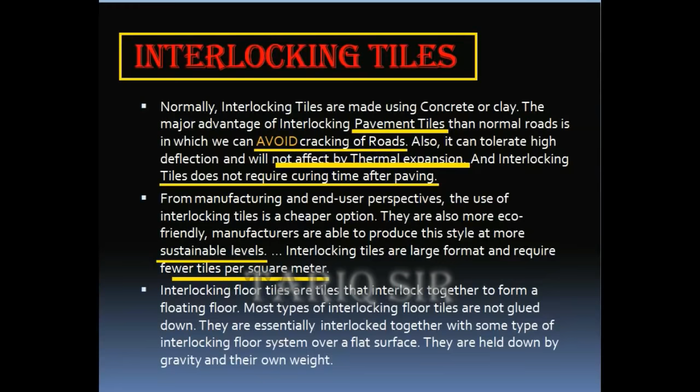And then the final thing is that it doesn't require curing. Whenever we have anything made out of concrete, or we use cement in particular, we have to use water. Then we come to the perspective of the manufacturer. It is a very cheap option, it is sustainable, and it needs very few tiles per square meter. For example, if you have a 1 square foot tile, a square meter is roughly 10 square feet, meaning you will need about 10 tiles per square meter.

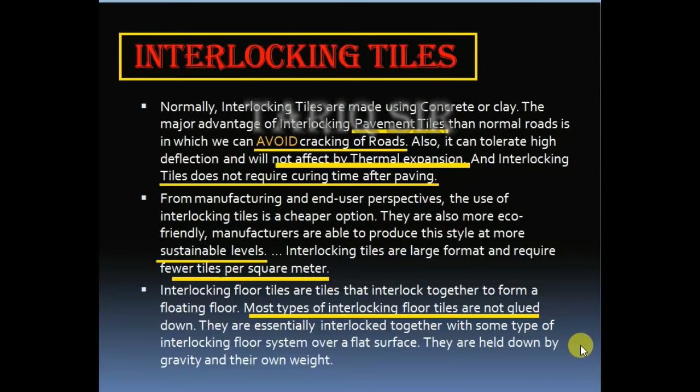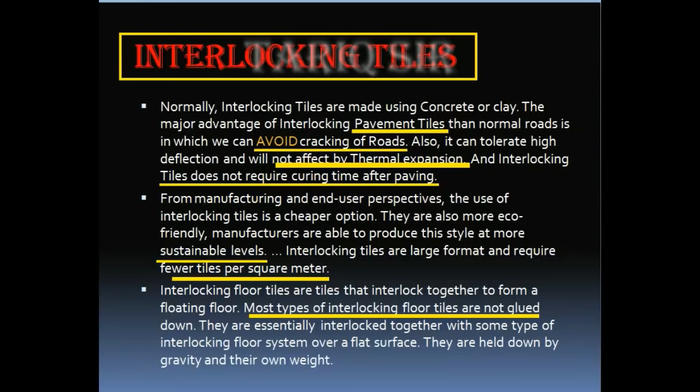Another important factor is that interlocking tiles do not require any material to fix between two tiles. They grip each other by themselves, so that's why it's known as interlocking. And in order to spread the tiles out on the floor, the road or the footpath, we require a flat surface. The surface should be absolutely flat.

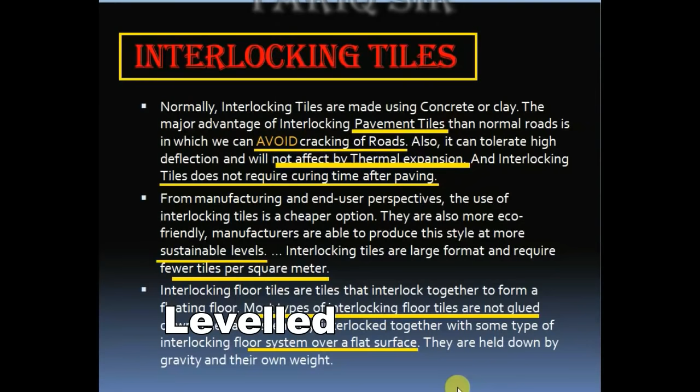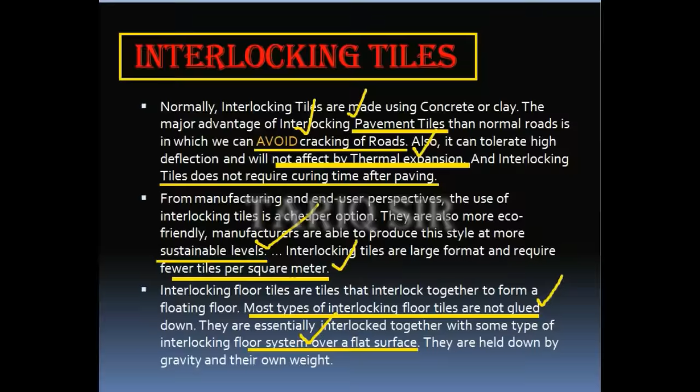So these are a few of the things. Number one, they are also known as pavement tiles. It avoids cracks. Then thermal expansion. Then it has a sustainable level. Then per square meter usage is less. Then you don't require any binding material, and you have to provide a flat surface in order to place these tiles. So now we'll come next to the cement concrete and hollow blocks. Before we begin, we'll go through some videos of fly ash and concrete hollow blocks.

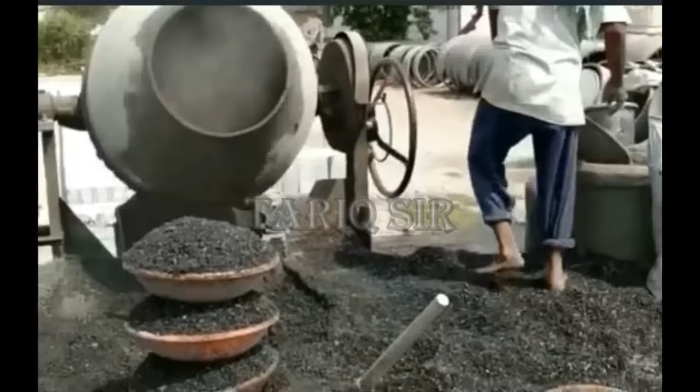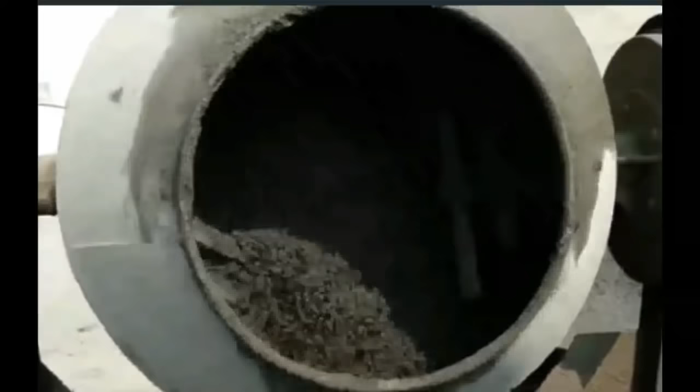Here you can see the bowls being filled with concrete, stone grit, and cement is being added to the mixture, and the mixer is running in full swing. Here are 3 bowls. Water is being added to get the proper consistency of concrete. This is done according to the required design, and according to that we take the ratio to acquire the required strength. Here we have grey cement, known as ordinary Portland cement, being taken out of the bag, and now the concrete mixing is absolutely ready.

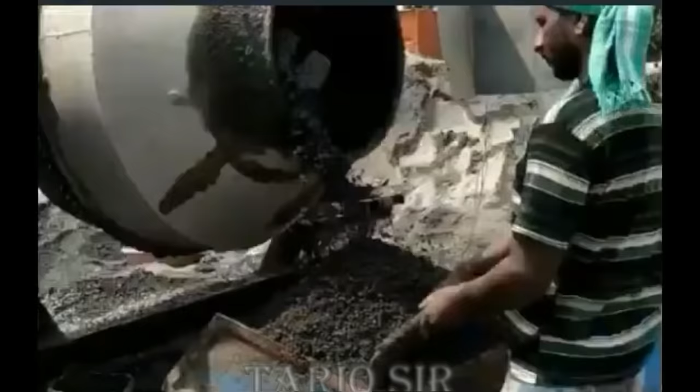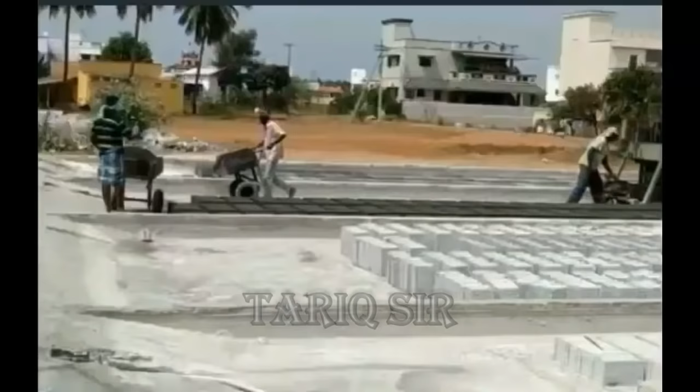You can see that there are blades inside the mixer. This helps it to mix around. So here we are going to tumble it out. Here the concrete is ready and is being placed in a trolley. This will be carried to the location where we are going to use it in the manual machine for making bricks. You can see the laborer carrying it. The empty trolley is coming back, and it's being filled up again.

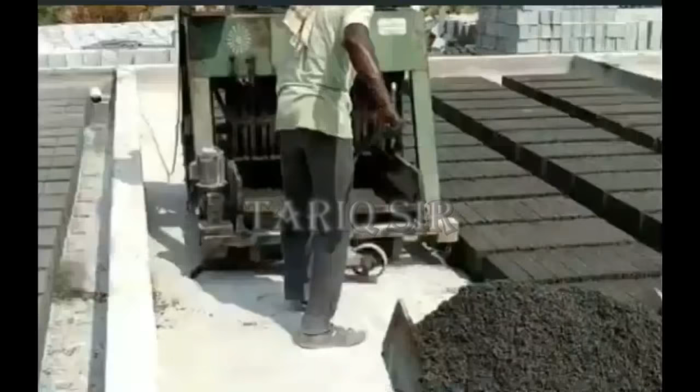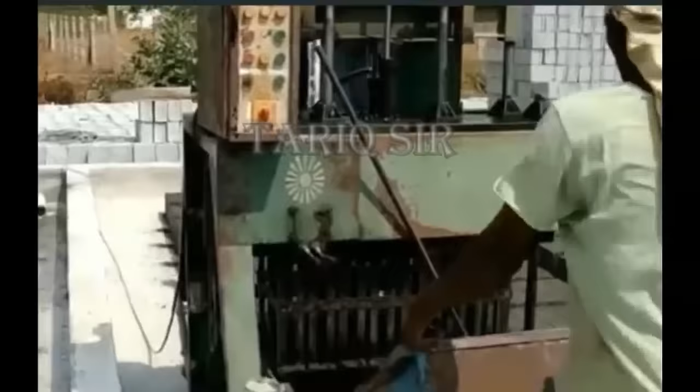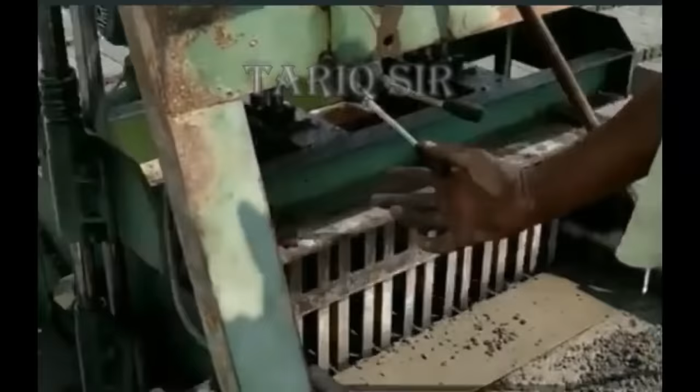Here you have the manual brick maker, which is making the brick. This is the concrete being poured inside over here, and when it's operated by the operator, it is compacted over here.

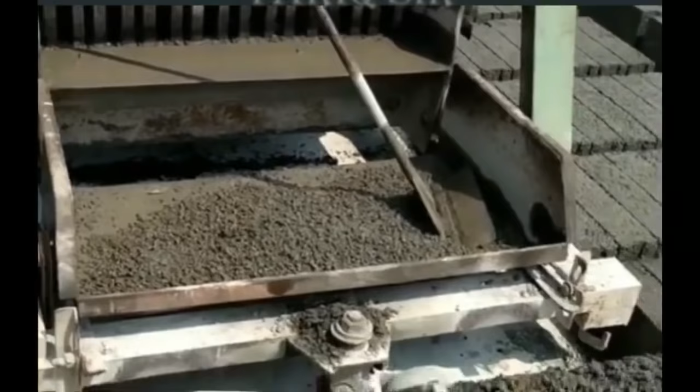It's being manually done. So this is a manual sort of a machine, giving it the proper shape or the size of the brick. You can even change the size, but for that you will have to change the size of the mold of this machine as well. And you have different types of mold as well.

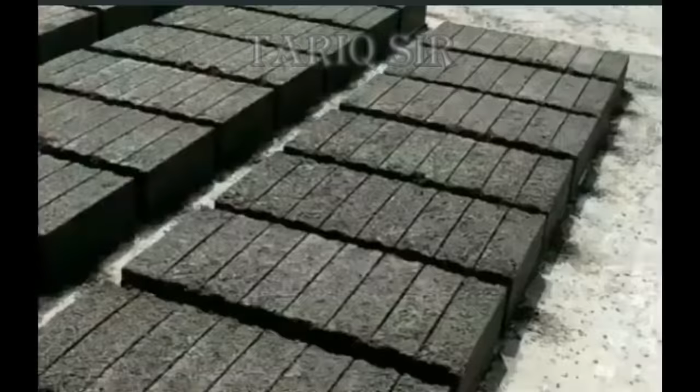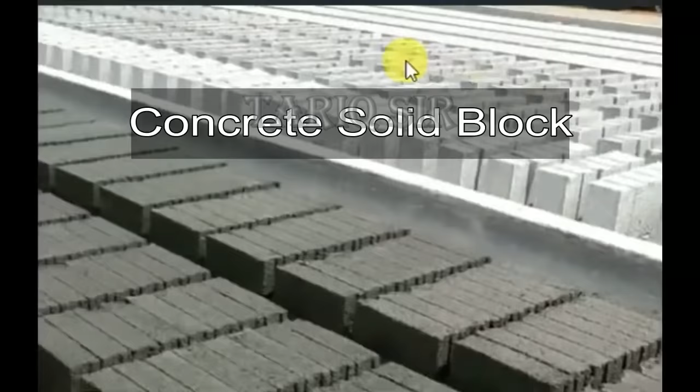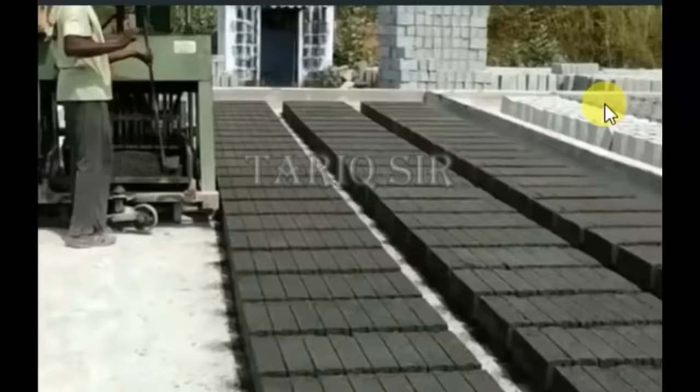Here it is running and it's operational. The motor is working along with it and it is being compacted manually. Here we have the bricks out, and you can see on the other side the dried bricks, and on the left hand side you have the wet bricks which will be drying. You will have to give them sufficient time for drying, and they have to be cured as well.

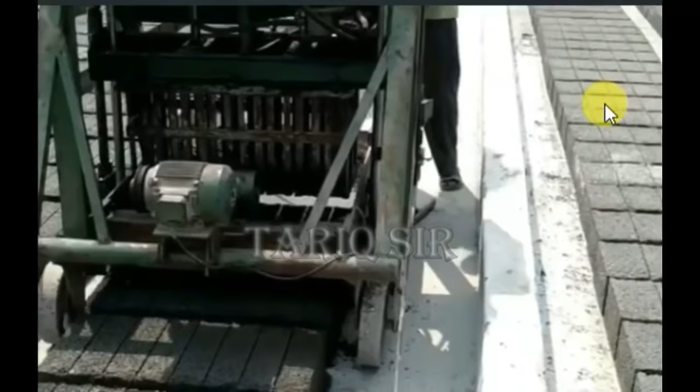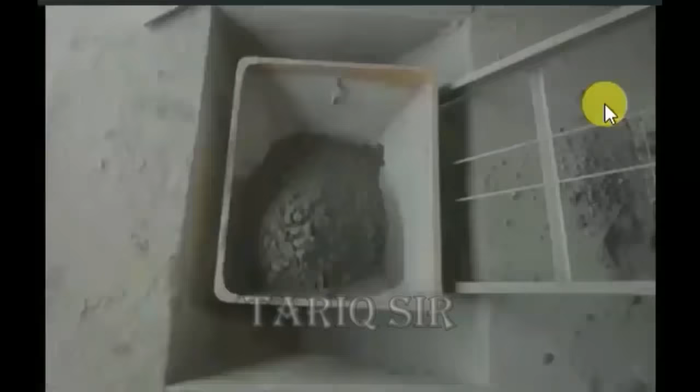Again you find the machine running. You see the compaction being done by hand. We also have machines that are totally electrically operated, where the compaction is also done with the help of the machine. We'll go ahead in the video and we'll find that the compaction is being done right on the machine itself.

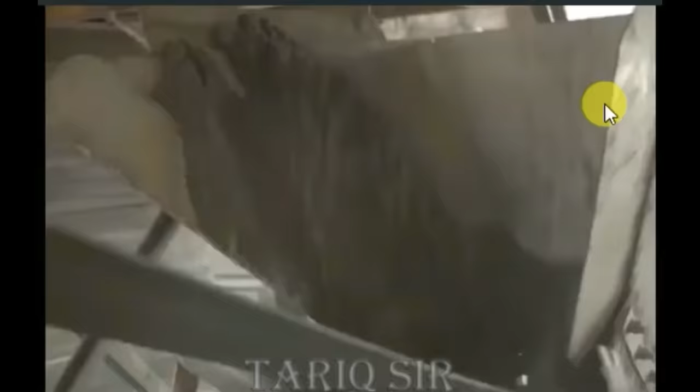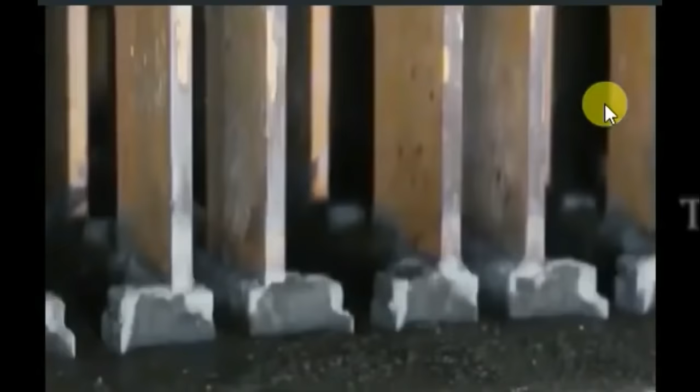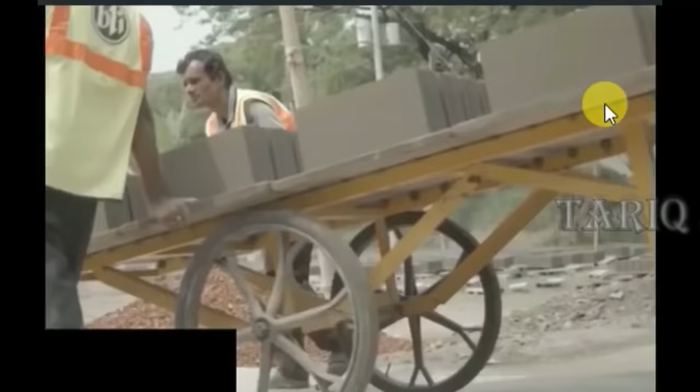Here you have the hopper, with the material being carried and loaded towards the hopper. The operator is operating it, and here it is being compacted. Here you have the solid blocks coming out, taken up in the trolley, and taken out to a position where they get sufficient sunlight, providing proper curing and water.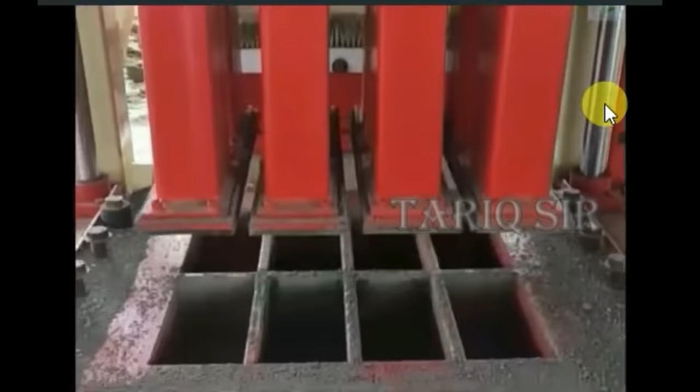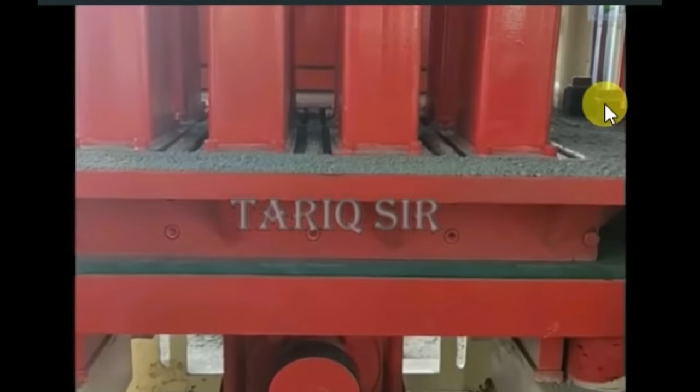And this is the full machine that is totally electrically operated. The pressing is done. Here the compaction is being done. This is a totally electrically operated machine. You have a very nice mold coming out. The brick is very clear, crystal clear.

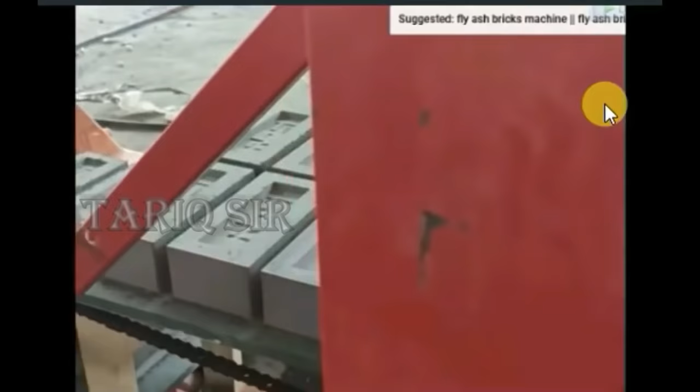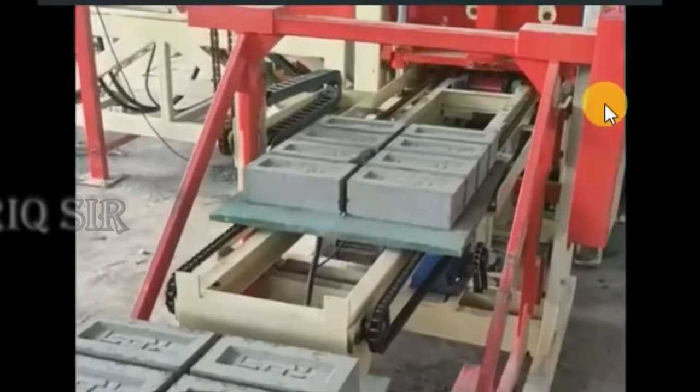You even have the logo of the company which is manufacturing this brick, and it's being carried away towards the site where it will be taken for drying. So this is how we make these things. One by one you're finding these bricks coming up, and this is the wall that is being made. It's a partition wall.

You have just watched the video regarding the manufacturing of bricks, made by a machine that was electrically operated. In the previous video we had seen the manual making of bricks as well. Now what we have over here is the cement concrete and the hollow blocks.

Now there are different types of bricks. If we go according to the manufacturing procedure, then we have quite a lot of differences. First of course we have the clay bricks, then we have the concrete solid blocks. These solid blocks are heavy. Then we have the hollow ones, where the bricks are hollow within. Then we have the AAC, which means autoclaved aerated concrete. Then silicate bricks, and of course these are light in weight as well.

And finally, we have a chamber of a brick which is created in a hollow type, and you can pour concrete over there. If required, you can provide steel. Steel is provided to give it more strength. Now, how is steel provided?

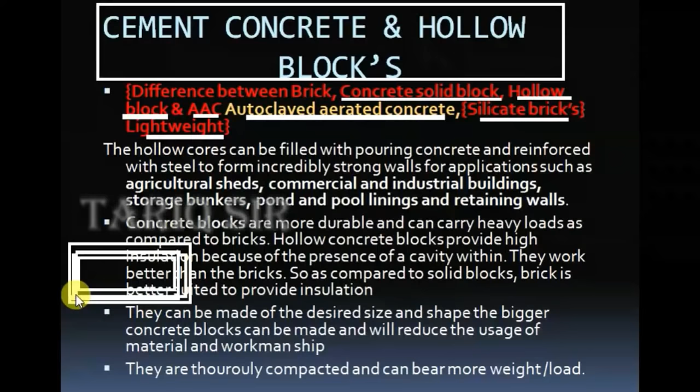What we do is we just create a rounded surface here like this. So supposing this is the cube top, and in this area we fill in the concrete, and over here we can easily place the steel, in between them. So this is how we can provide steel in it.

So this is the 3D view which has been made with respect to this image. These are all the hollow parts beside them. I'll just draw it for you. If you see over here, this is the hollow part. So you can fill in concrete in this area and it will go inside the mold.

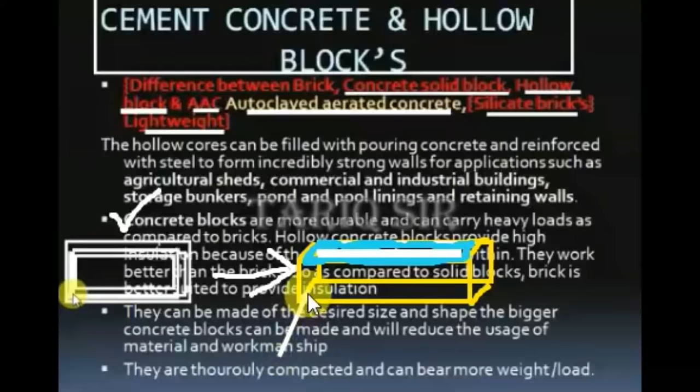So when you fill up the mold, it will take the concrete inside over here, and the size will be of course the same as the mold, and you will have a hollow brick coming out made of concrete. You can give it the desired shape, so there is no issue regarding that. So this blue part that you see over here is where the mold is hollow. So from here you pour in concrete.

Next, we are going to talk about these differences over here, right on top. We'll take up these differences one by one, in the form of a comparison, right? A comparison between all these types of bricks that we have discussed till now. It's a very vast field. We have many other procedures, and there are still many things that have been left out, but I think that this is enough for you people.

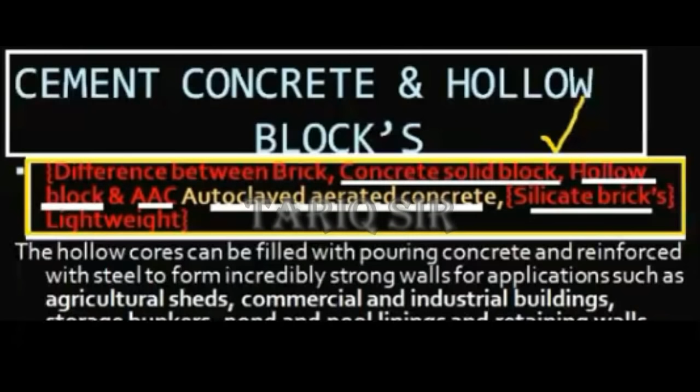So we'll just go to the tabulation form for comparison of these blocks and bricks that we have studied till now, and finally we will end the session of bricks. And whatever suggestion I get from you, I'll get down to the next topic. So let's get down to the comparison of the bricks and the hollow blocks with cement and clay bricks.

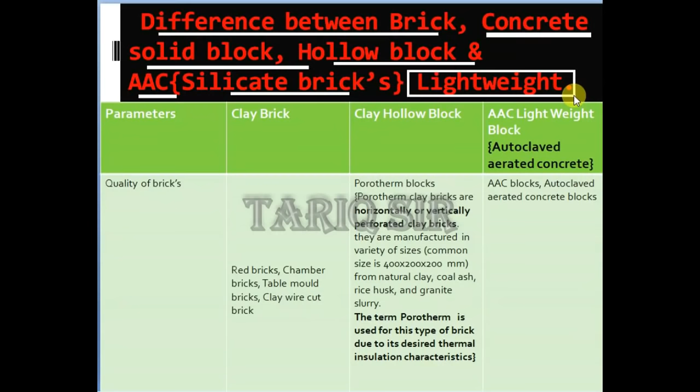So here you have the difference between the bricks, that is the concrete solid block bricks, then the hollow blocks and the AAC bricks, that is the silicate bricks, and of course the lightweight bricks. These are some of the bricks that we are going to discuss in a technical way. We'll go through the parameters over here for the clay brick, the hollow clay brick, then the AAC lightweight bricks. This AAC means autoclaved aerated blocks.

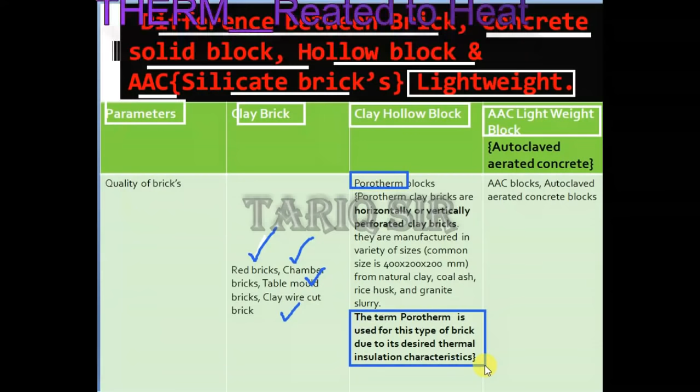Now, what is the parameter for clay bricks? The color is red. It is a chambered brick, which means it has to be molded in a chamber. It can be table molded or wire cut. Now we have another important term, and that is porotherm. Therm refers to thermal energy, the thermal characteristics of the material that we are going to use. So these are clay hollow bricks, in comparison to concrete.

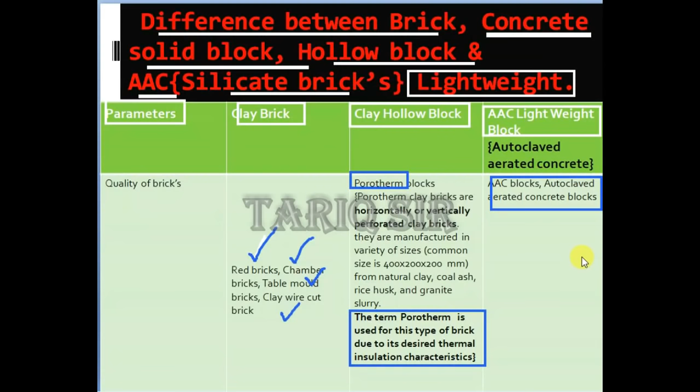And because of it being clay, the thermal heat will not be transmitted outside, in chimneys especially, or anywhere where we have a lot of heat, like the brick kilns; even there this is applicable. And then we have the AAC blocks over here, that is the autoclaved aerated concrete blocks.

Now we'll be going through some of the technical parameters of the various types of bricks: the composition, the weight, the advantages, the strength, the color, the load carrying capacity, and the number of bricks that we require in a meter square. You can take a screenshot of these parameters and keep them with you. Whenever required, you can use them.

So first we'll go with the clay bricks. Here I have added the concrete solid block as well. This clay brick has soil, sand, lime, and other concrete materials, though the concrete material is very less in quantity. The weight is about 3 to 3.5 kgs for a 3-inch brick, that is the breadth of the brick, up to 4.5 to 5 kg, and it requires zero maintenance as it is fire resistant.

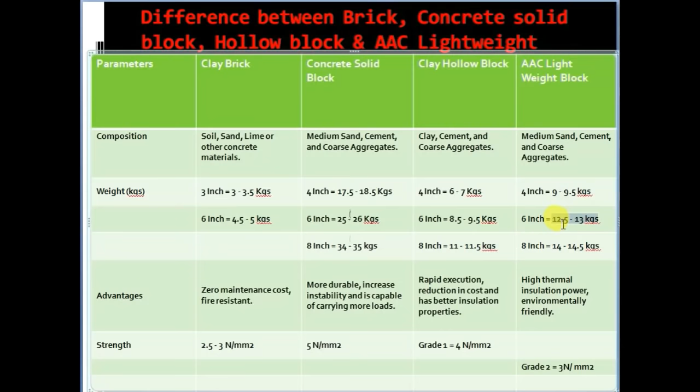Then we have the next one, the AAC lightweight bricks. Over here also we use sand, cement, coarse aggregates, but here we are not using clay at all - it is totally cement concrete. For the 4-inch brick, it is about 9.5 kg. For 6 inches brick, it is about 12.5 to 13 kg. And for about 8-inch, it is about 14.5 kg. It has high thermal insulation.

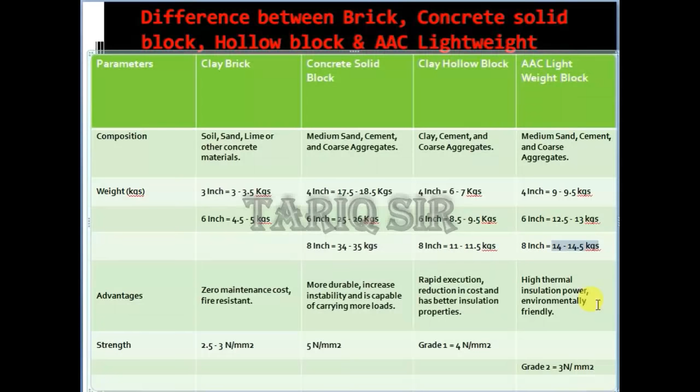Now this one has both things - it also has good strength in comparison to others, and it also has good environmentally friendly insulation. Even if there is heat outside, like in a house, if you build it up with this, then the heat will not come inside, or rather the temperature inside the room will definitely be less towards the outside temperature, in comparison to concrete ones which are not hollow. And then the color - it is gray. Does it have a capacity to bear load? No, it reduces it because it is hollow. And the number of bricks that come here is 8 per meter square.

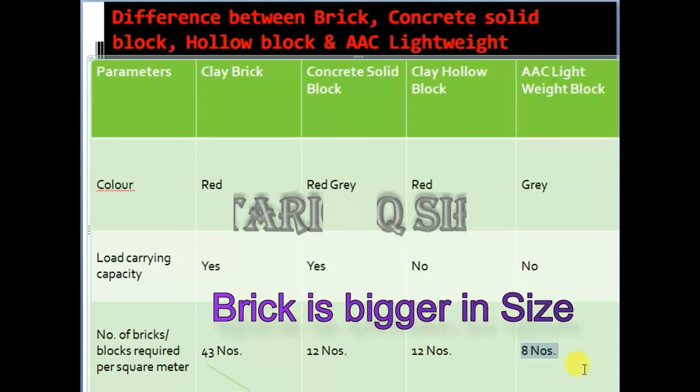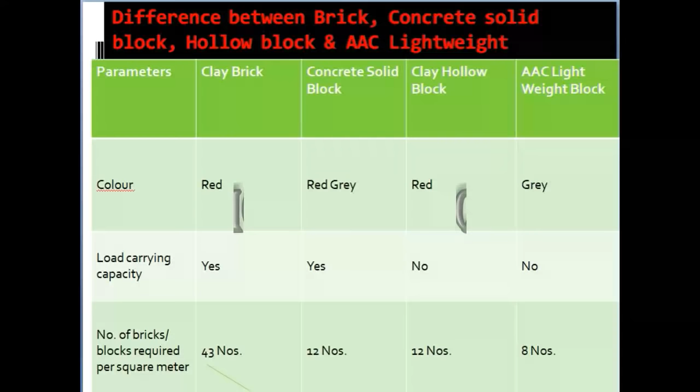So that is all we have for these bricks. We'll come up with the next video shortly and go through it. So for the time being, this much is okay in bricks.